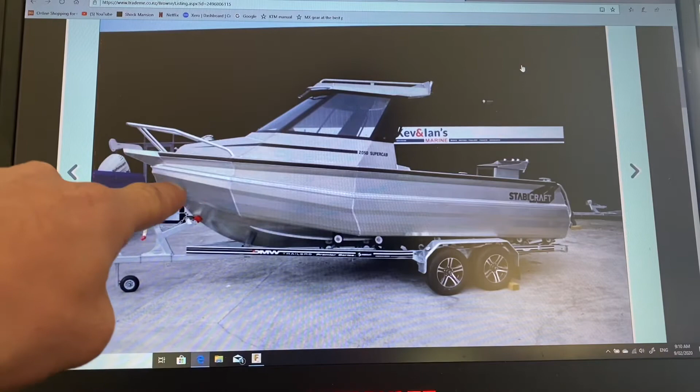What I'm trying to create is this pontoon shape here. It's a three-piece, an inner, an outer, and an upper. And as it comes along, it tapers. So the problem I'm having is the taper, when I convert it to sheet metal, it's not recognizing it. So if I bring up my part and just play through my construction, hopefully somebody might be able to pick up where I've gone wrong.

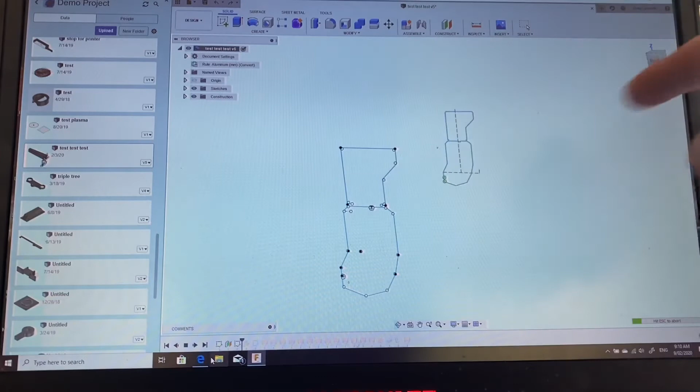So here I am for a start creating a sketch. I create my sketch with an offset sketch, reduce it. Now I'm lofting between the parts. At this stage I've made sure all the radius is the same, so all the corners are one piece. So all the radius on these corners between the two sketches here and here are 6mm radius and the internal is 3. The material thickness is 3mm, so this should be correct within the sheet metal rules.

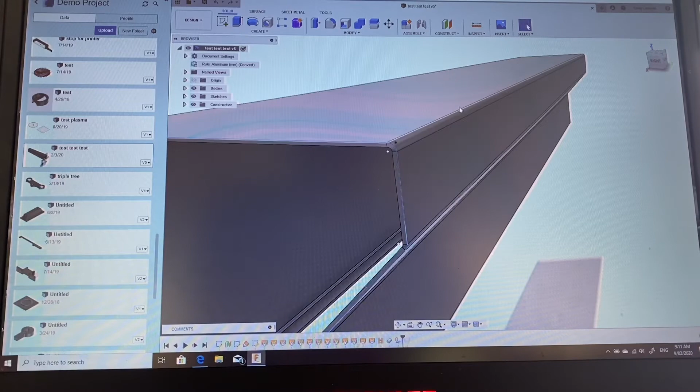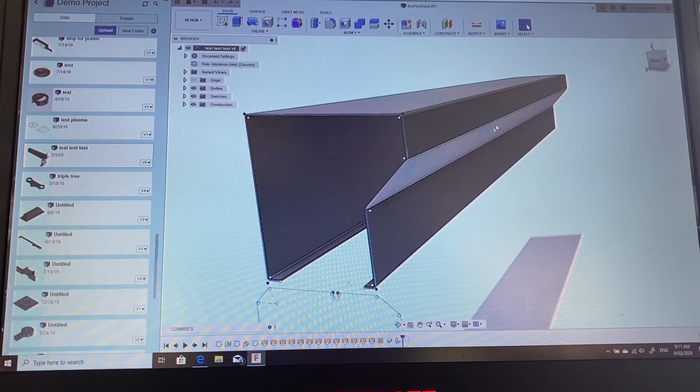So the only difference with this part is that it's reducing in size as it extends down the length. So I've done this in a straight piece and it will unfold, but for some reason when I'm reducing it down to the smaller size at that end, the sheet metal doesn't seem to like it. So if you look in here, all my fillets in the corner, they all measure up the right amount.

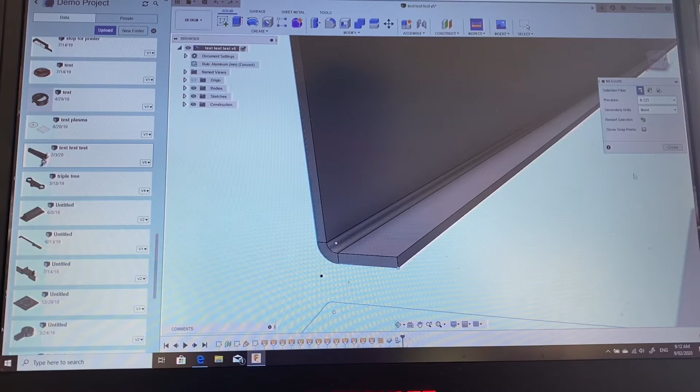So the radius is 6mm on the outer bend, which is fine. The distance between the two, so if I measure between here and here, it's 3mm, which is my sheet metal rule. I've got aluminium, 3mm. The K factor is set at 0.44, which is just the default setting, which should be fine. I've tried playing around with that and I can't get it to make any difference.

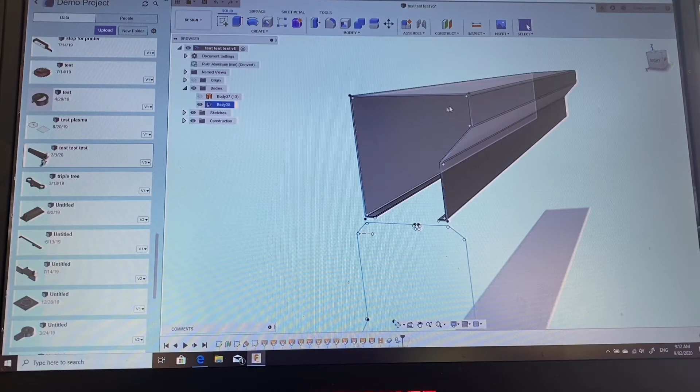So at the moment I've got, drop down my bodies, I've got this as a sheet metal part, so I've lofted my two sketches, I've stitched it together down here, then I've created a sheet metal body out of it. So now if I go to my sheet metal and create a flat pattern, pick a face, that one's picked, so create flat pattern, unfold. So I get the error come up, so there's no flat pattern showing at all.

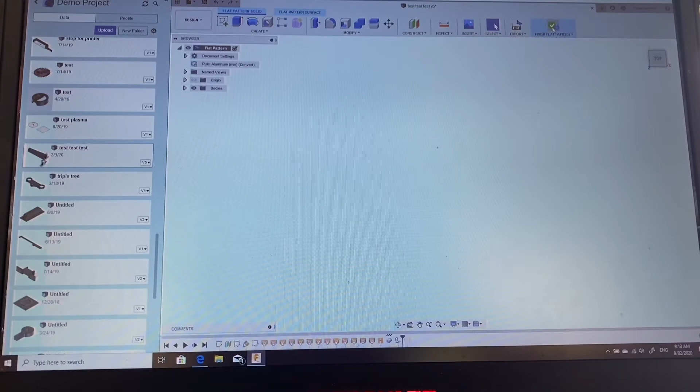So if I exit flat pattern, go to my flat pattern and delete this, then try again, go to create flat pattern. If I turn this around and pick a different face, say that one there, go OK. Just waiting for it to process. So there's obviously something in the body that Fusion doesn't like. It's picking up on it. So when it does convert it this time, I've had problems where it will only unfold one crease. The others won't unfold at all.

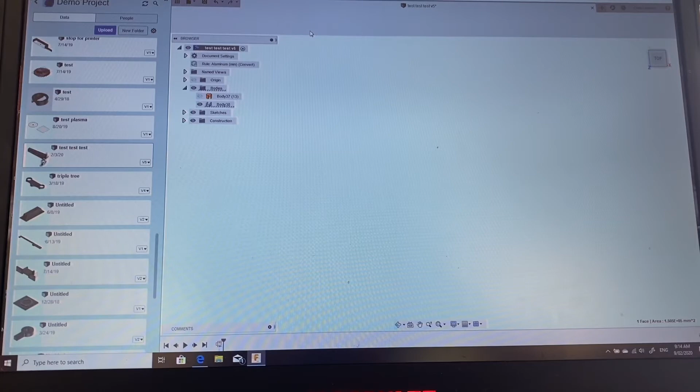So even if I try and go through, instead of going create flatten and just go unfold, it'll show what I'm talking about. It will only unfold one edge and the others aren't getting recognised as bends.

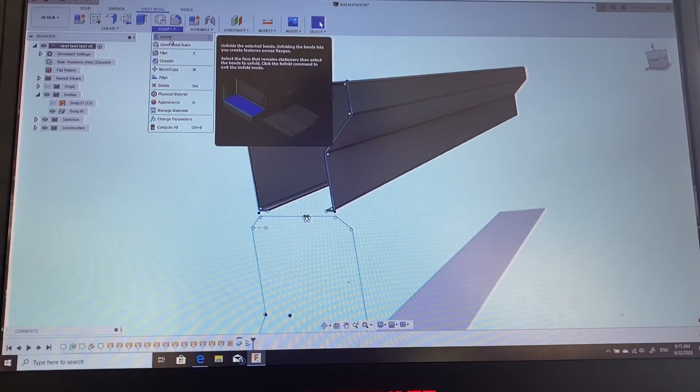Yeah, sorry, I had to stop the recording then because the computer spazzed out. But as you can see there, it says error flat pattern and it just came up with a new flat pattern once again. So this time I've got a flat pattern there, so I'll go to modify and unfold. Select the face, so I'll select that same one as I did last time. So let's pick this one here. So as you can see on here, there's only the two folds coming up, up down bent, which is a bit weird.

So then if I select one of these to unfold, so it won't even let me. So again, the program's not liking it and it's freezing up. This computer I've got is a couple years old, but it is a good fast computer, so I'm not thinking that that's too much of a problem. It's more in either the design or the software. So again, this is Fusion 360 that I'm using.

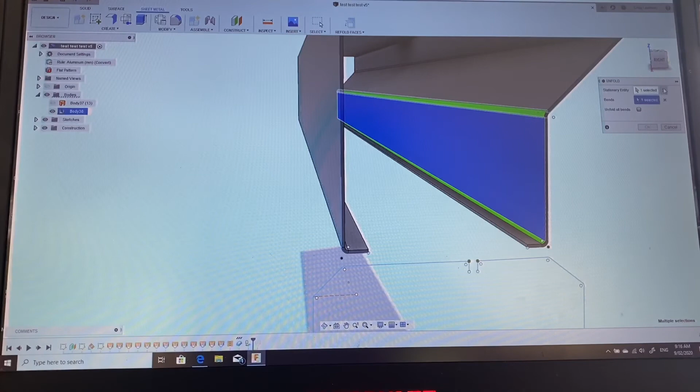I'll try not pausing it this time and leave it a minute and see if it can respond. Yeah, so that hasn't worked. So again, this time I'll try a different face. So we'll select this face up here, and then when we go into bends again, it's only these two bends that are showing up. So if I try and select one, we'll see if we can, and this time I'll just do a nice right angle one. So I click that.

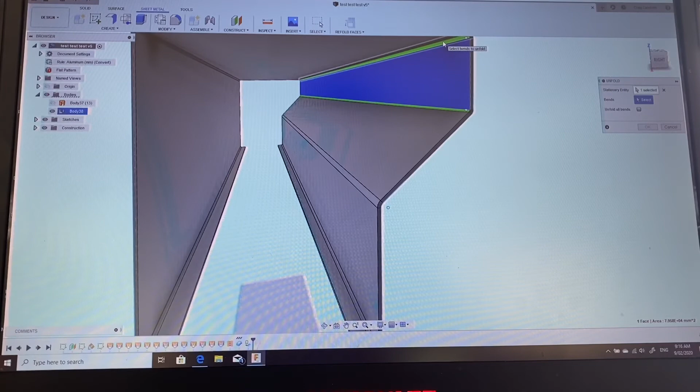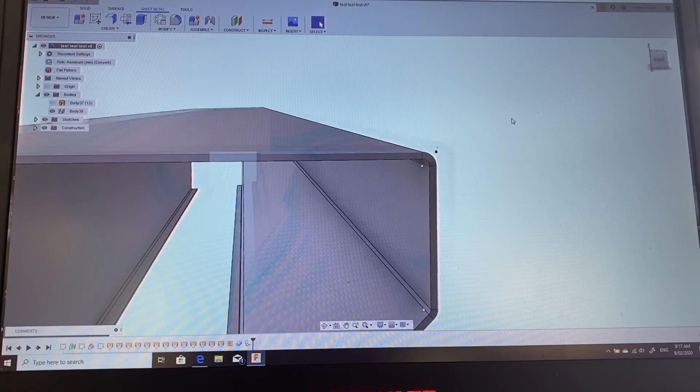Yeah, so it's coming up with error. So it has let me select the bend, but it won't let me unfold it. So there's definitely something wrong with the flat pattern. I've spent many hours on this trying to get it right. So hopefully somebody out there might be able to help me.

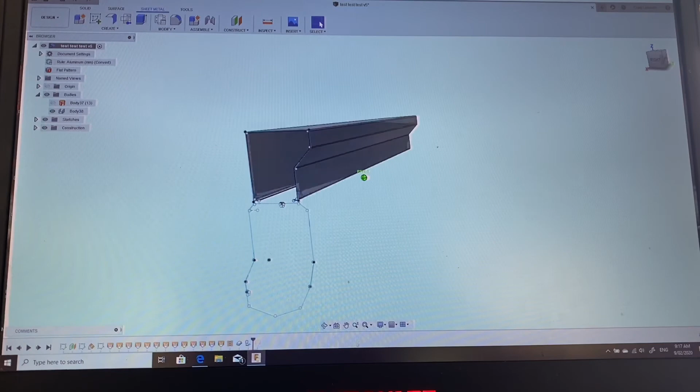At the moment, I'm only working on the top body because at one point I did create all this lower body as well for the pontoon, but that just seemed to hinder things even more. So I thought I would do them in separate components. So this outer component here will be one, and this inner component here will be another. So I'll actually have three components to unfold into three separate pieces.

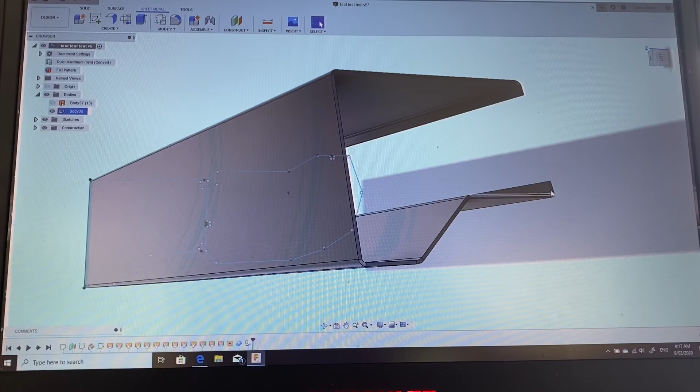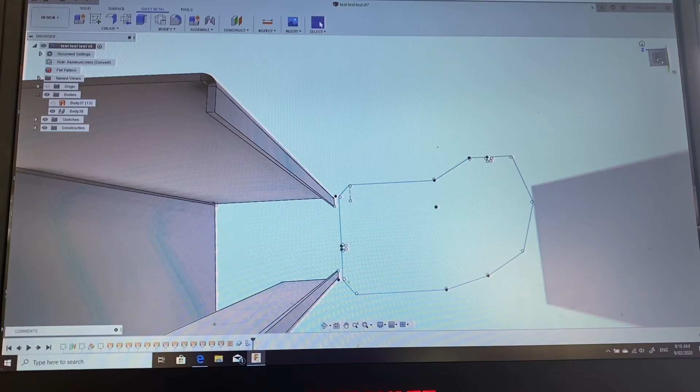Along the way, I've checked all these edges. So if you come down here and look, these are all 90-degree edges coming off the face. So it was well within the sheet metal rule. All my flanges here, they're 20 mil, so I've got heaps of material there. Unfortunately, I can't create a sheet metal part and then loft all these angles off it because the part is reducing in size. So if I just click on the front here and just show you real quickly, you'll be able to see what I'm talking about.

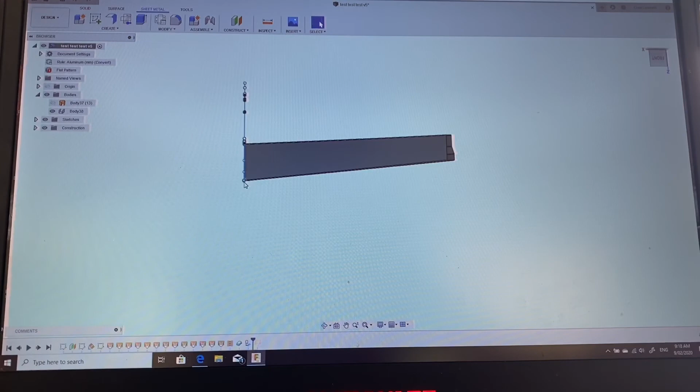So you can see the body there is reducing from one size to another. So this sketch here is 100%, and this one here is 0.7 of the original size of the first. And as mentioned earlier, I have come through and changed these radiuses here, so they are 100% radius. So these radiuses are all exactly the same as the other sketch down the end. So there's no dramas with that. It's just somewhere else.